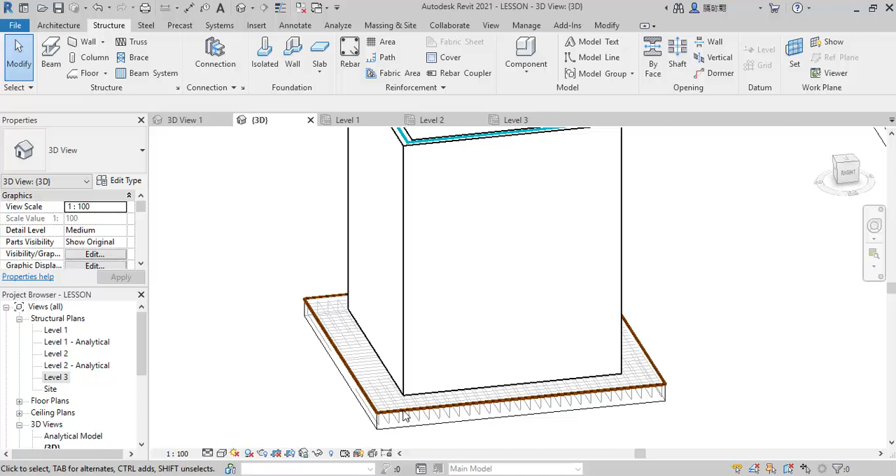You are welcome. In this lesson we will be learning how to reinforce a shear wall. We have already reinforced the raft foundation in one of our lessons, so you can check that through the video. Stay tuned, let's start.

So we navigate to the story tree. Alright, so I am at level 3 now, level 3, just like this.

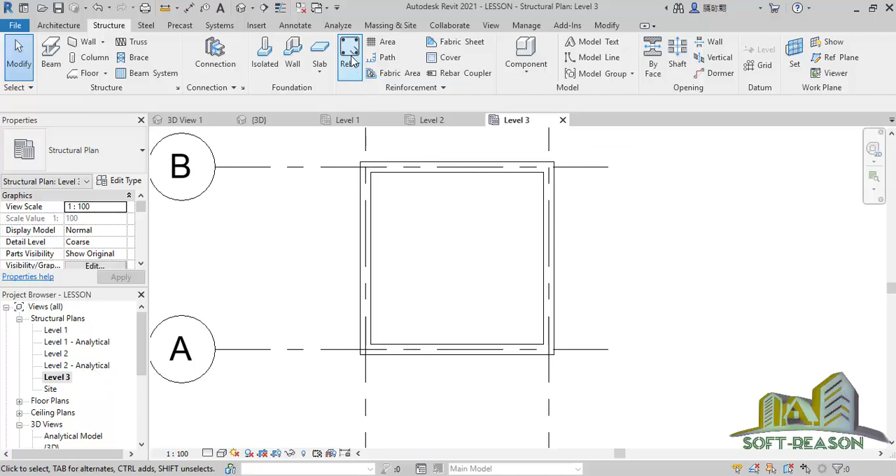So I will enable my Rebar. In the Rebar browser I will be using this rebar. Once I select this one, I will come to the placement and select near cover reference, and for the second placement I will be using parallel to work plane, this one.

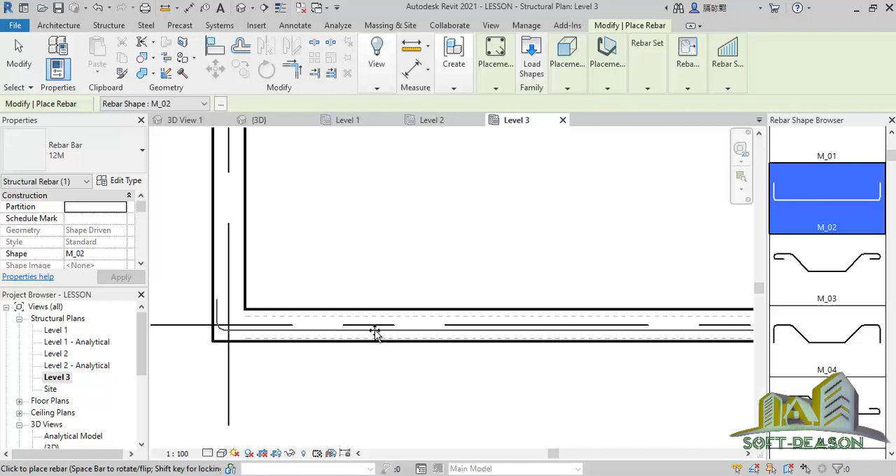So I will bring this rebar close to this place. You can see the cover is already highlighted in a dotted red line. So I want to place one here, just like this, place one here. After which I will click on the escape button.

So what I need to do, if you select this line now, just like this, you will notice the property of this line. You can see the rebar is 12M, meaning it is 12 diameter.

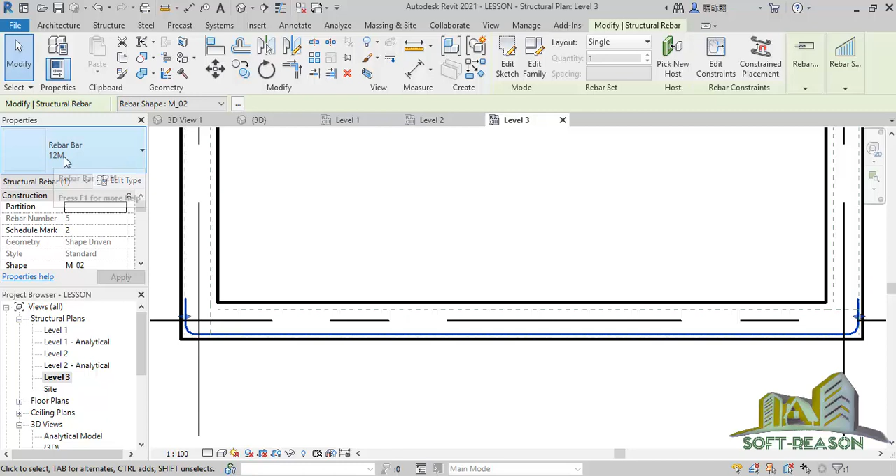So what I want to do is I want to reduce this hook, the hook length. I want to reduce it so it can fit into what I want to do, meaning I want to edit this rebar now, so I will go to edit type.

So in the edit type, this stirrup slash tie bend diameter is 50. I want to reduce it to 25, just like this.

Then the standard hook bend diameter is 80, I want to make it 40, and the standard bend diameter is also 80, I want to make it 40. The bar diameter remains the same, approximately 12 millimeter diameter.

So I want to come to this hook length, then I will click on this edit. The standard 90-degree hook length is 200, so I want to make it 100, just like this, the same thing there.

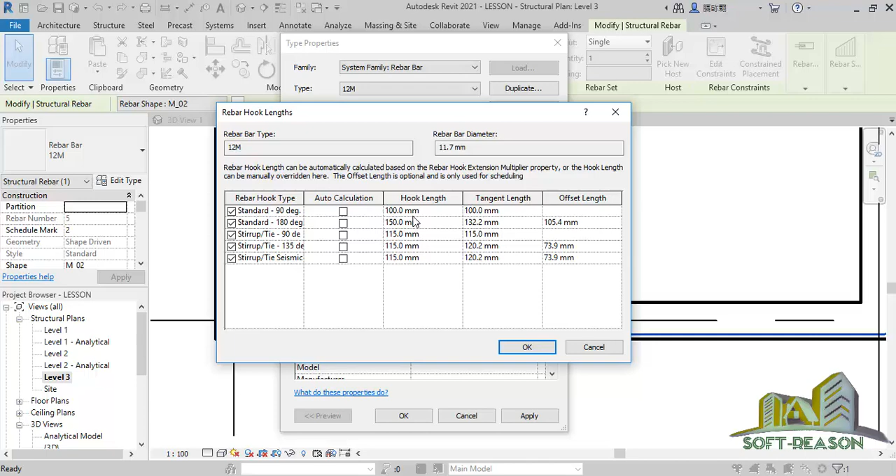Then click on OK. Once I apply, you see the changes here. So I click on apply, you can see the changes there, and click OK. So this is what I want at first.

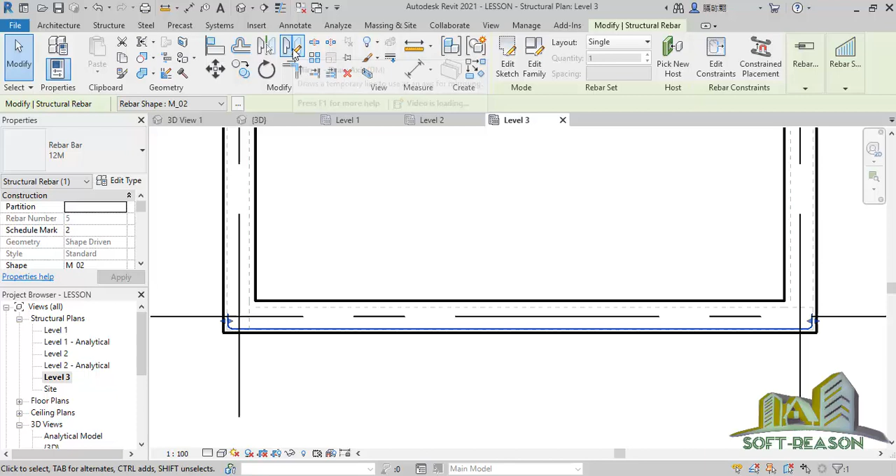Then what I need to do now is to mirror this. I will click on the mirror, click at this point, and then click here. It has mirrored, so this is what I actually wanted. So we have done in this direction, now we'll be going to this direction.

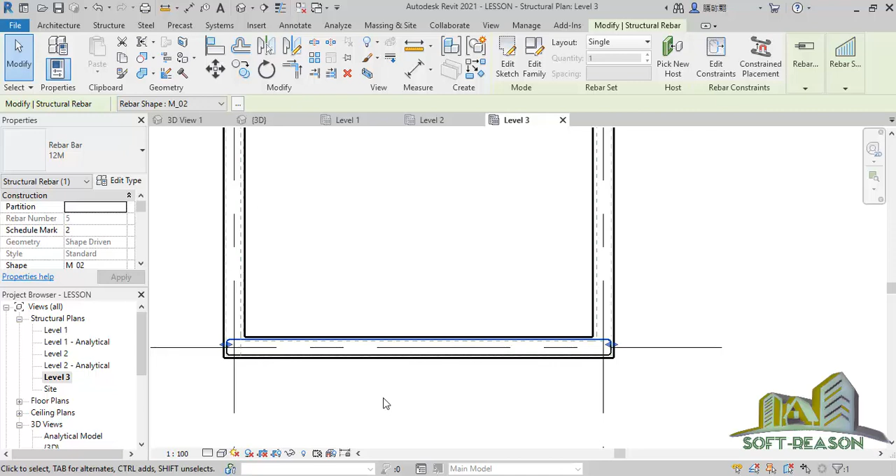But before we go to these directions, we will go back to our rebar and try to do something. Select this first one, hold the control key, select this one, just like this, and see if this can be copied. Successfully, let's check and then click on the copy.

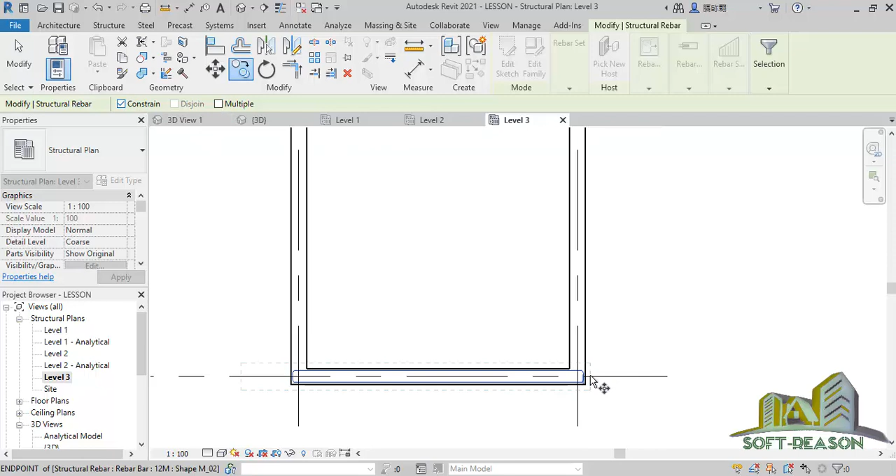Then we click on the constraint so you can move in that direction. So I will click on this point, then move it this way, just like this, and then I click on this point. Alright, it's been copied successfully.

So we have the bars here and here now. So we want to place it in these directions, this same bar 12M. So click on the structural tab and then select your rebar.

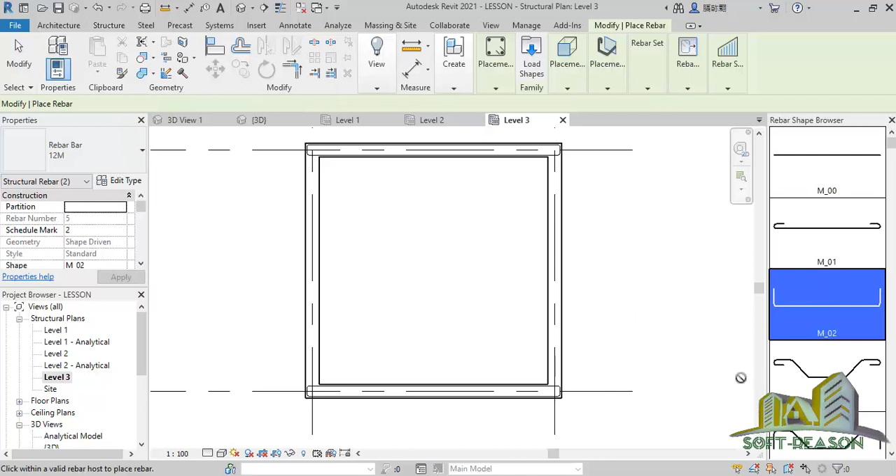Alright, so you now try to place it, just like this, place it just like this. Then you click on modify and select it, then you use the mirror tool.

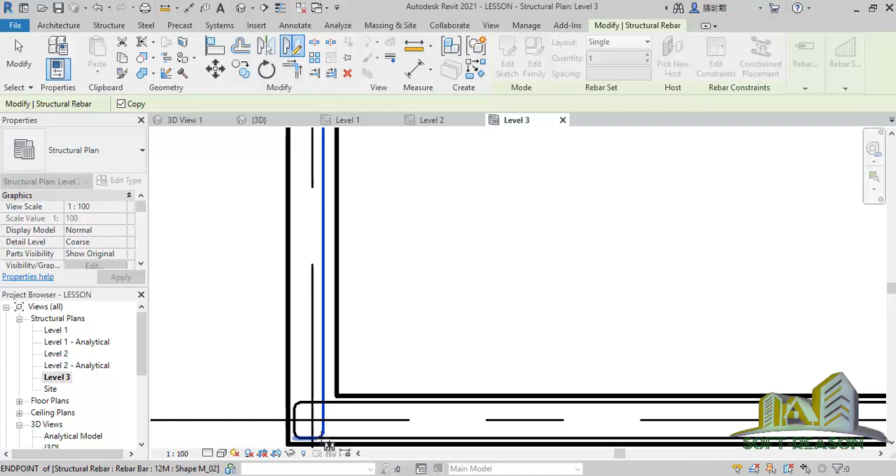The mirror tool, you can click at this point of intersections, this point like this, and then select here to mirror.

But we will have to adjust this, just like this, and also we adjust this one just like that.

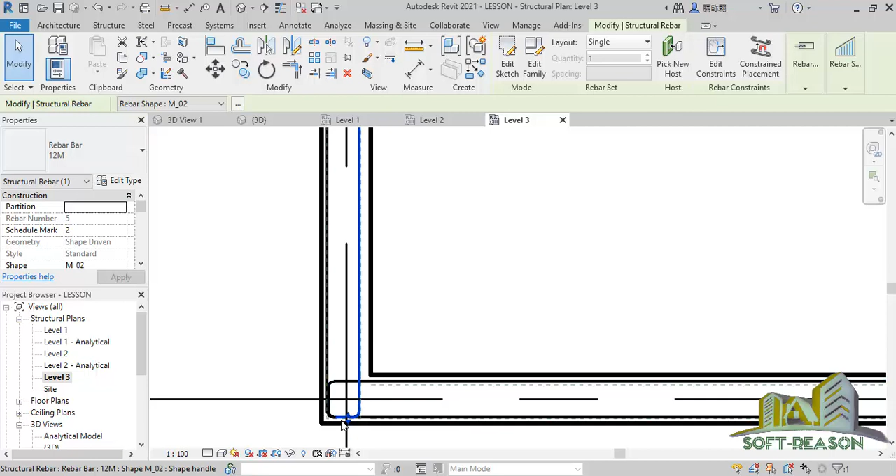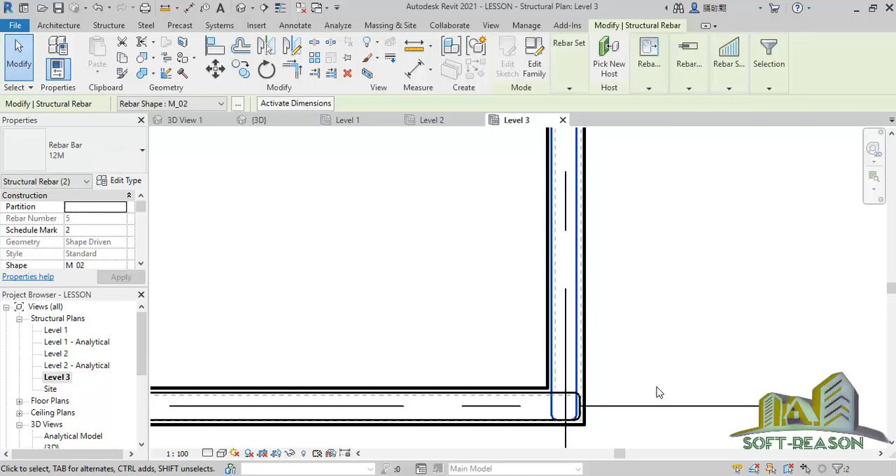You hold your control key, you select this, and then you click on copy, you enable constraint. Then you click at this point, and then you click this point, then you can move it a little bit this way.

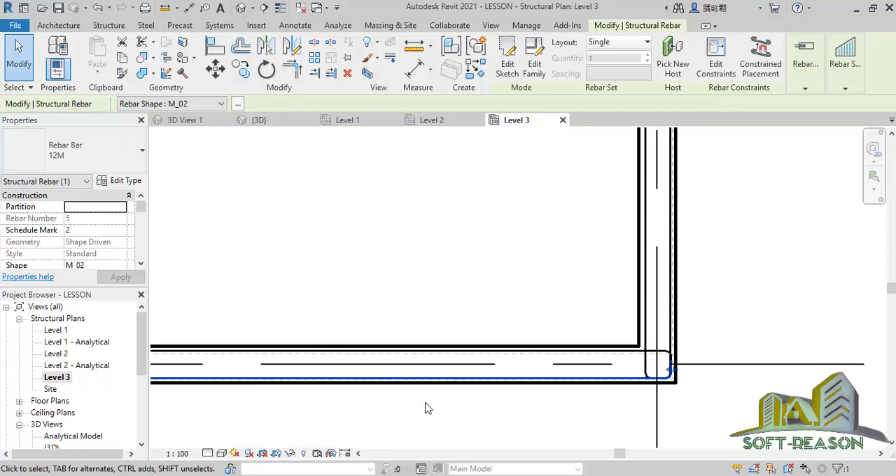So after placing this successfully, the next thing we need to do is select one of these, like this. Then we will type SA. This SA will help you select all the bars that are here, select all.

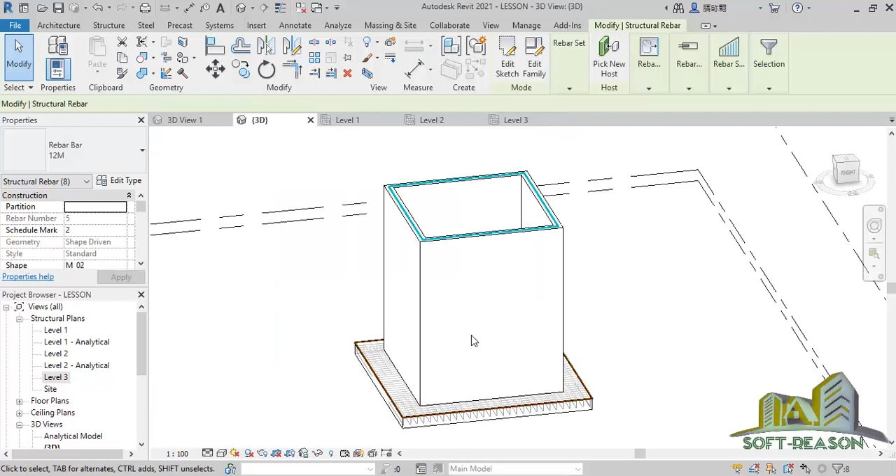So what we need to do is we want to actually generate it, but before we do that, I would like us to navigate to the 3D, just like this. So once you navigate to the 3D, I want to make this a little bit transparent.

So I will highlight the walls, so all the walls are highlighted. I will right click, go to override graphics in view, and then select category. You move this to this point for a kind of visibility transparency, click applied, then click OK.

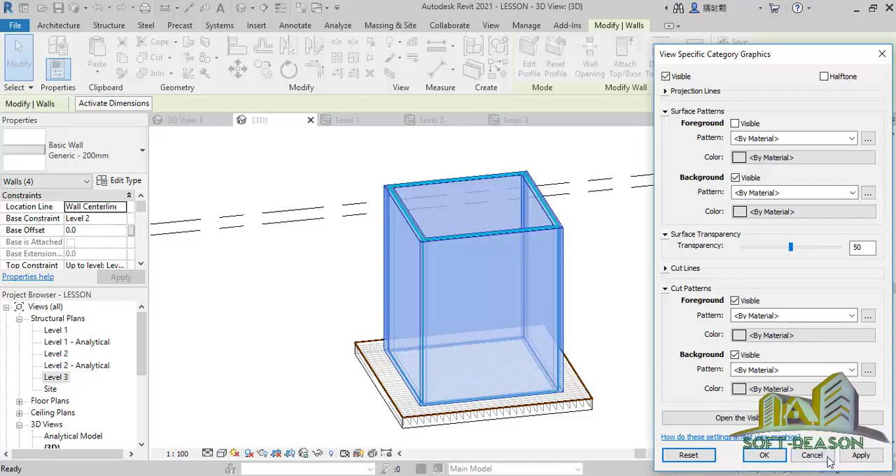You can see it's being transparent. So you go back to level 3, and in level 3 you can now select one of these, and then you type SA to select the rest of the bars, just like this, and then you navigate to the 3D again.

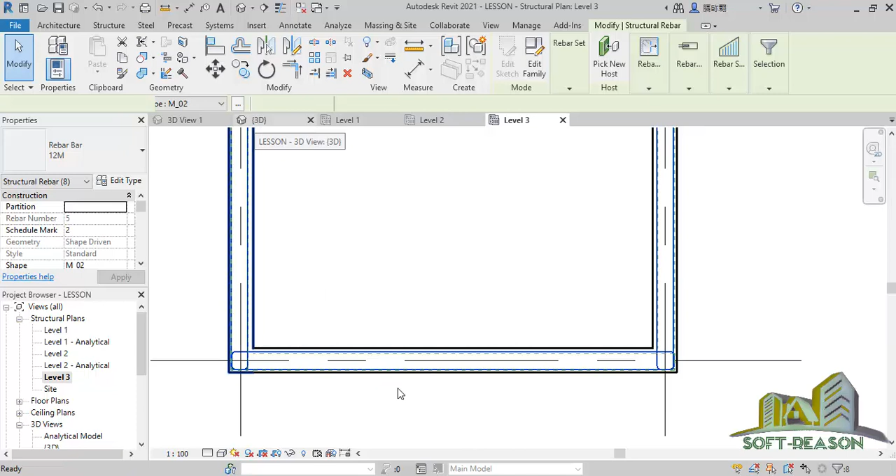Alright, so now what you need to do is you come to this place, where you have this rebar set. Then you select maximum, and you can see all the rebars have been generated successfully. So you come to this place and negotiate the spacing.

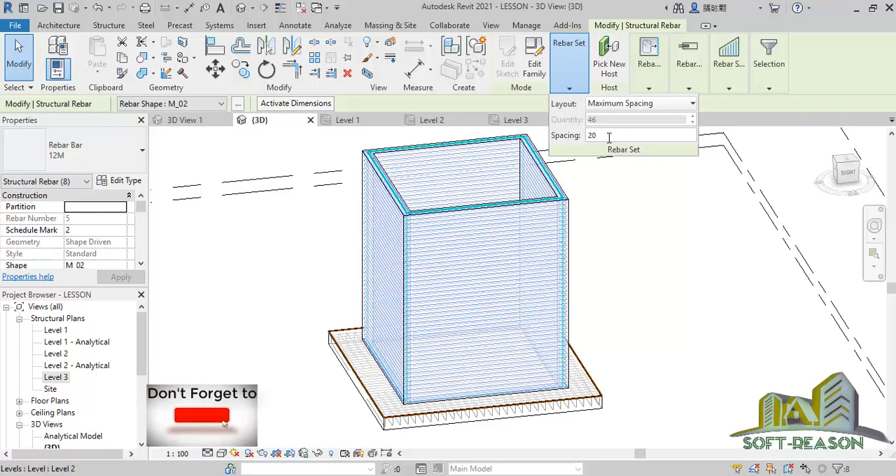I want to negotiate the spacing to be 200. Alright, so this is the rebar generated in the horizontal directions.

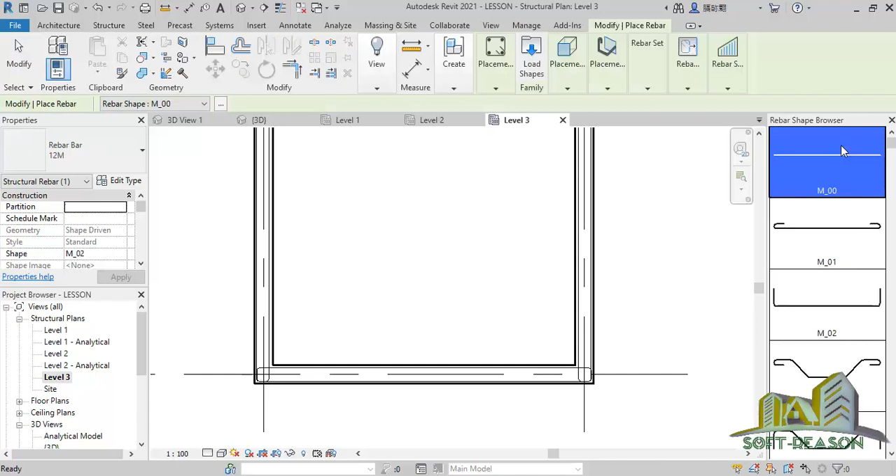So I want to go back to this level 3 in the plan view. Alright, and then I will navigate to the rebar browser, and in the rebar browser I will select this one. Once I select this one, I will come to this place and select this perpendicular to cover.

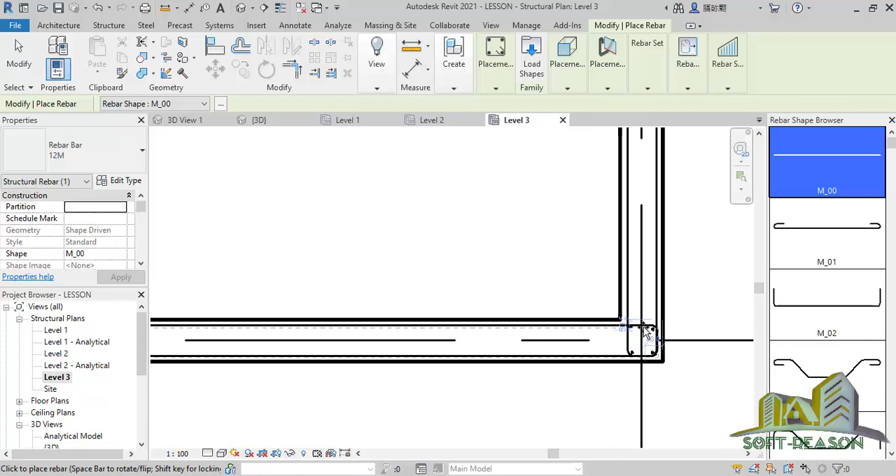Just like this, and then I'll be able to have this. So I will click this point, click here, put one here and one here, and also one in this place. After which I will be generating this bar towards these directions. So what I need to do is I will escape.

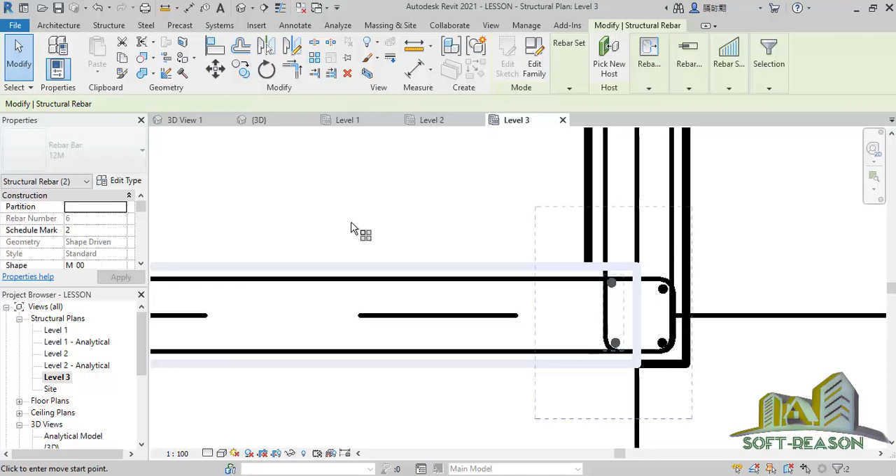Select these two, this one, and with the control key select this one. After which I will select the array tool. Once I select the array tool, I will click on this place, this one last.

Then in this place I will give a number, for instance I will say 50. So I click on this point. I will have to zoom it out. Click on this point and then come to this point and click.

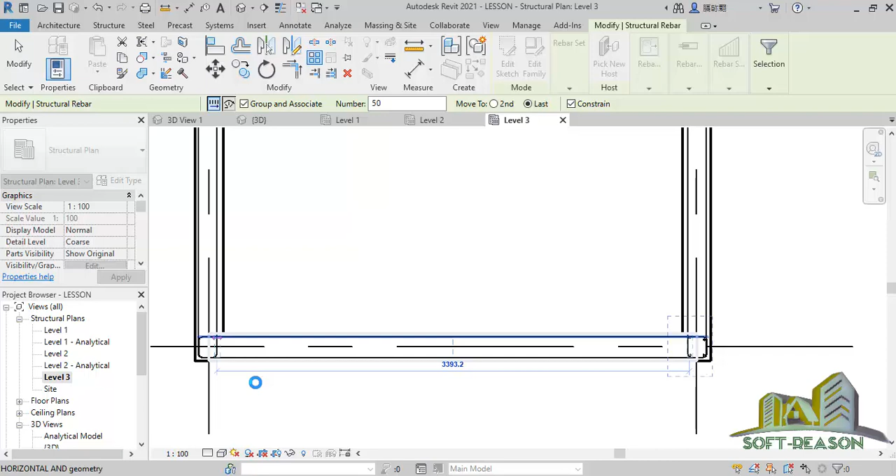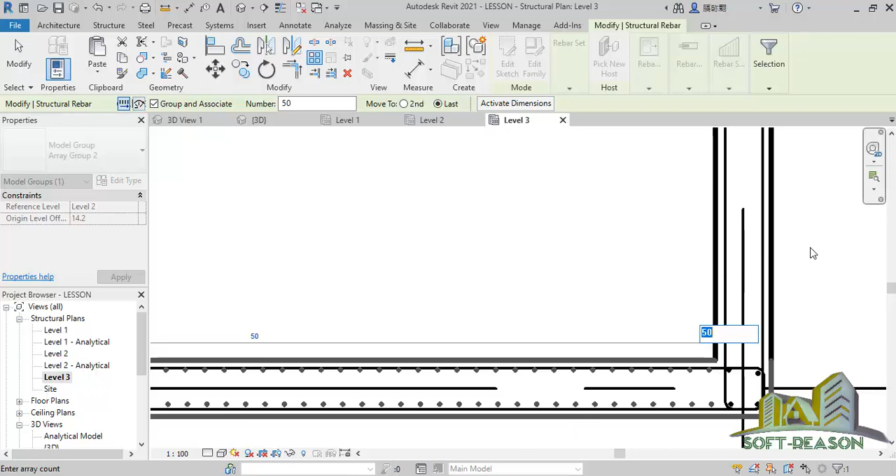Alright, so you notice the bars are generated successfully in this direction. And so I will be doing the same thing in these other directions, so I can negotiate the number of bars I want in this direction, but this is okay by me, so I will click outside of the workspace, and it's in place now.

Okay, so these two, I want to ungroup these two. I click on this ungroup tool so as to ungroup these two. Alright, now these two are ungrouped. I can use my arrow key on the keyboard to place it, right?

After which I will copy. I can copy this one now, click on it, select this one, and then use the arrow key to move it inside of this place, just like this. Then select this one and correct its position.

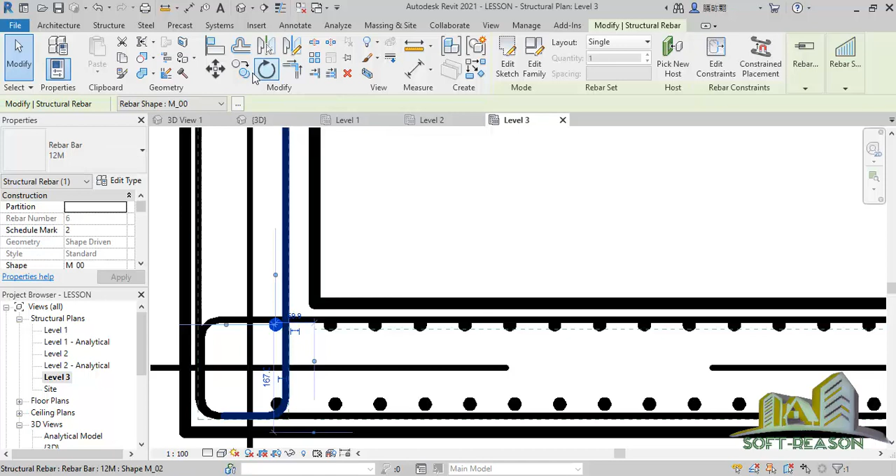Now I can also copy this one. I copy this one, I click on multiple, so I can place more than one. Put one in here and also put one in this place. So I can adjust this one now, just like this, using the arrow key.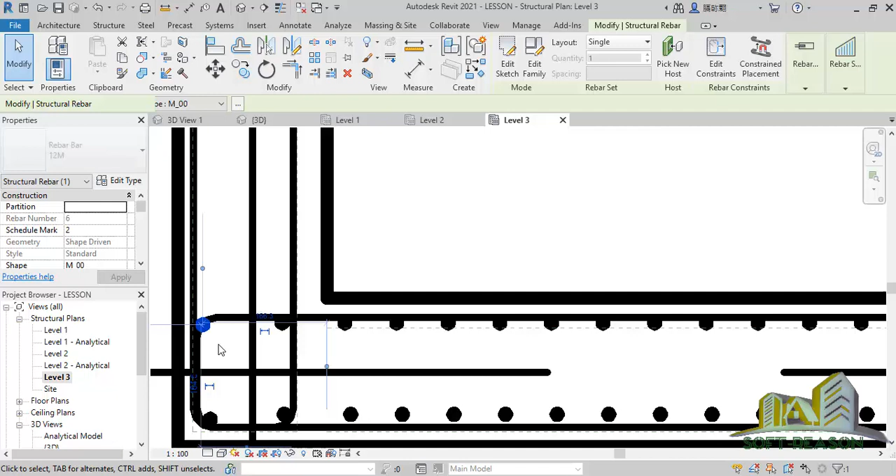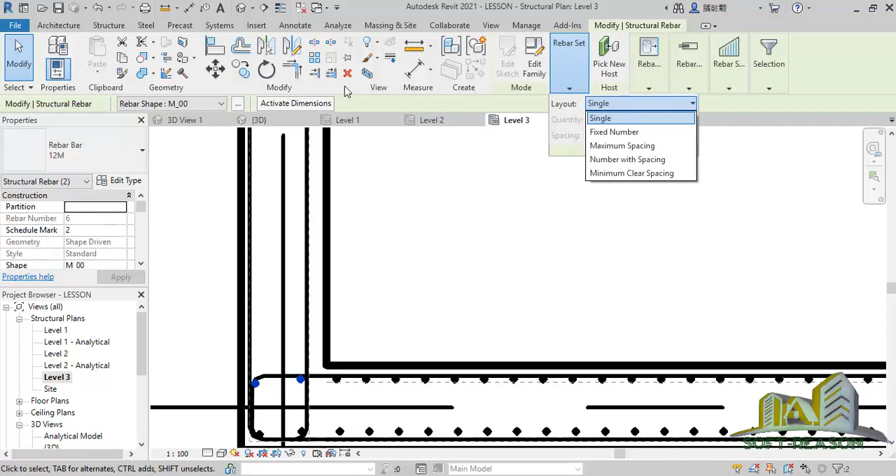Alright, so after which I will hold my control key and select this one, and then I will go to maximum spacing. I will still use the array first. After selecting these two, I will still use this array, click on the array, and give a number to be 50. Then you zoom it out.

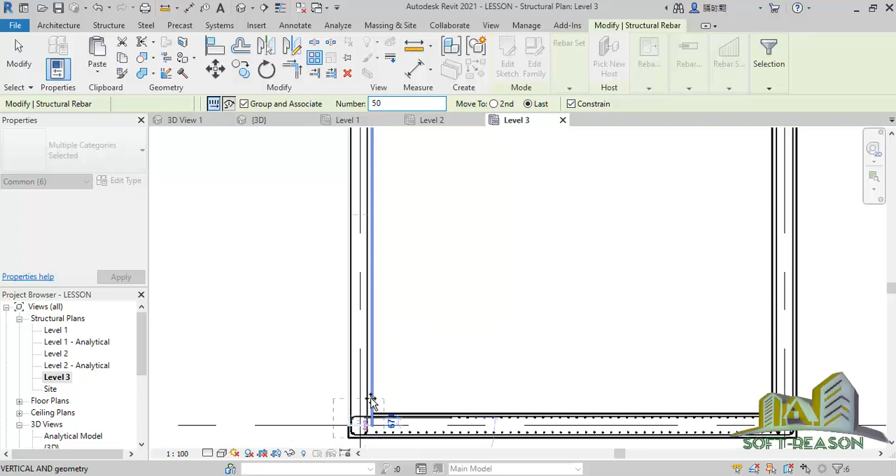Just like this. Once you zoom it out, you click on this bar, and then you click on this particular point. Alright, so it's been generated also successfully.

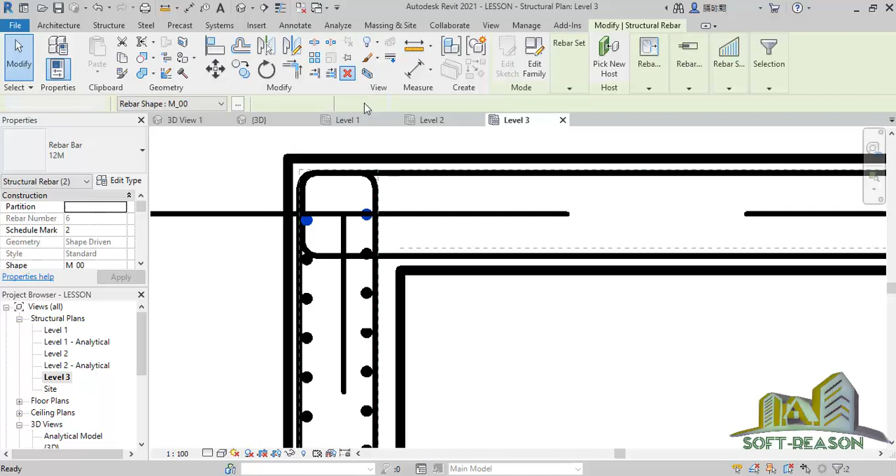Okay, so what we need to do is I will ungroup this one and delete it, just like this. For this one, I will also ungroup it, then use the arrow key to place it at the right position. I'll select only this one so as to be able to place it very well.

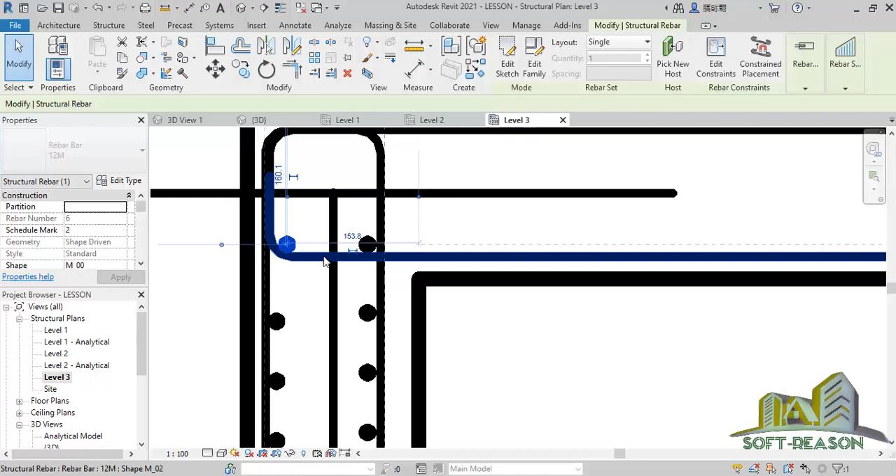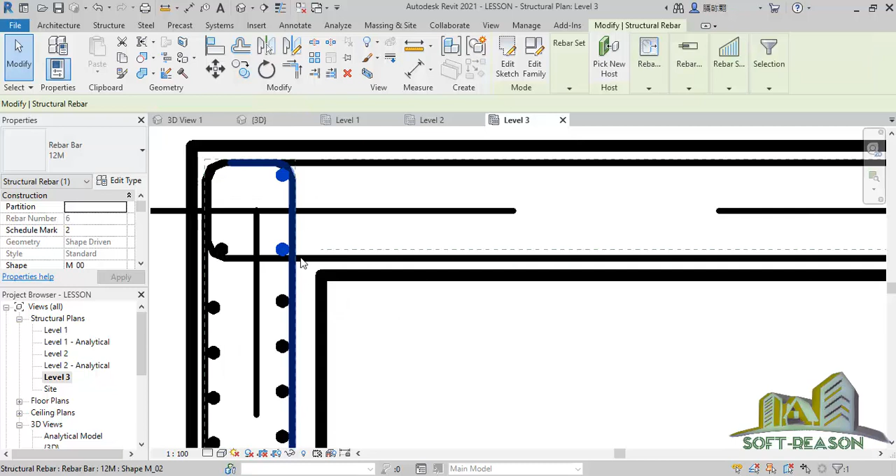Just like this. Alright, so I will select this one and then click on copy, and as well I will select the control key so I can select the two of this. Alright, after which I will click on the array again.

So as to distribute it in this direction. So I will type 50 here, then I'll click on make sure you enable constraint, so that you can move in a specified direction. Then I'll move it to this point and click.

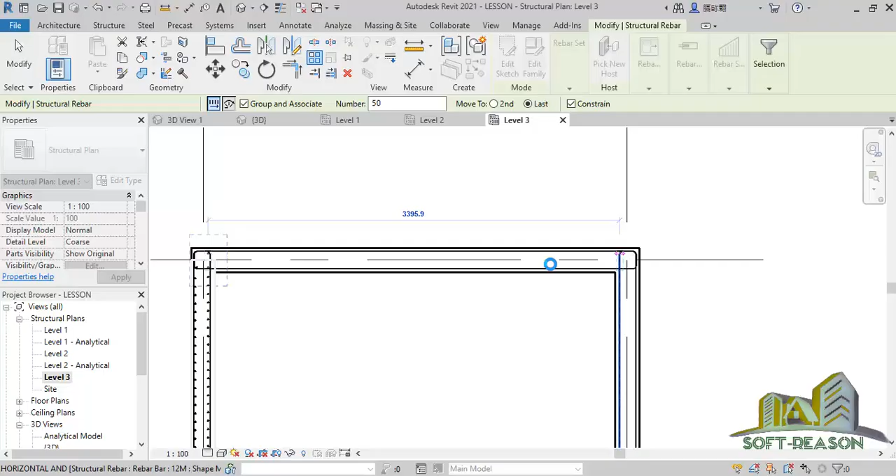Alright, it's being generated. So I'll select this one. I will ungroup this one, and then I will move it just like this. And then I'll select this, and I'll be able to copy this to this direction, just like this.

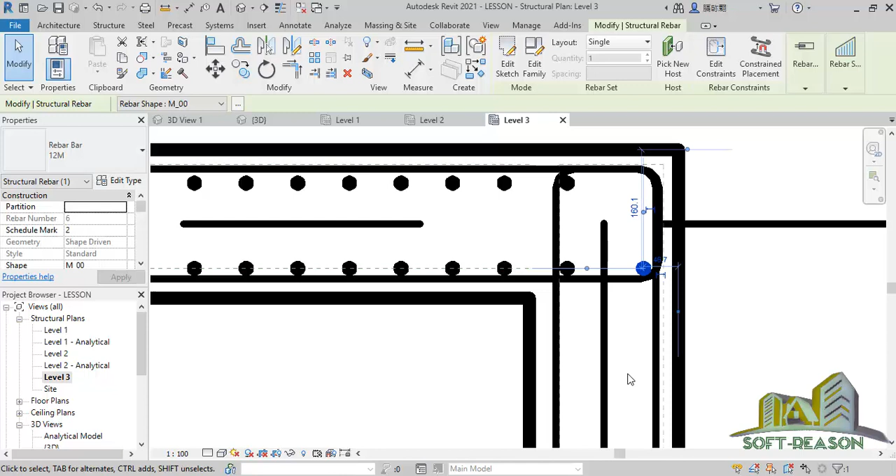Alright, after which I may use the arrow key to adjust it. Click on escape, adjust it using the arrow key, just like this. So I'll hold my control key and add this one to selection, and then I click on array.

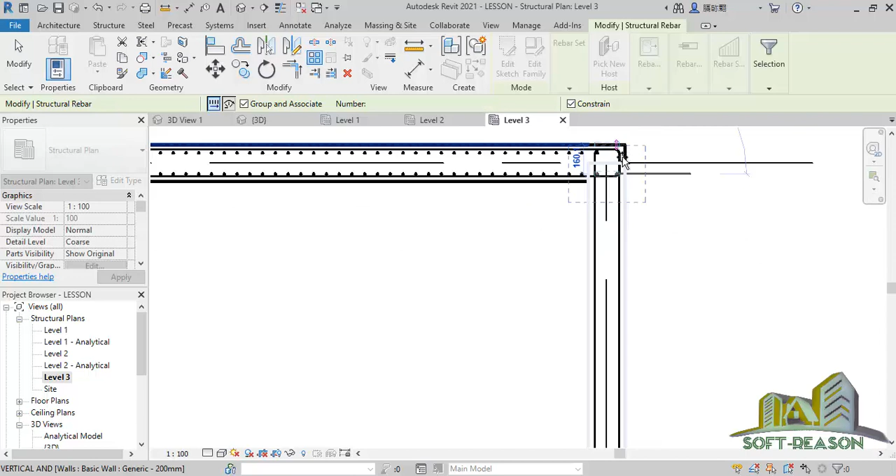Type 50 here. And then I will click on this one, zoom in, and then select this last point so as to generate it in these directions. Alright, so it's being generated successfully.

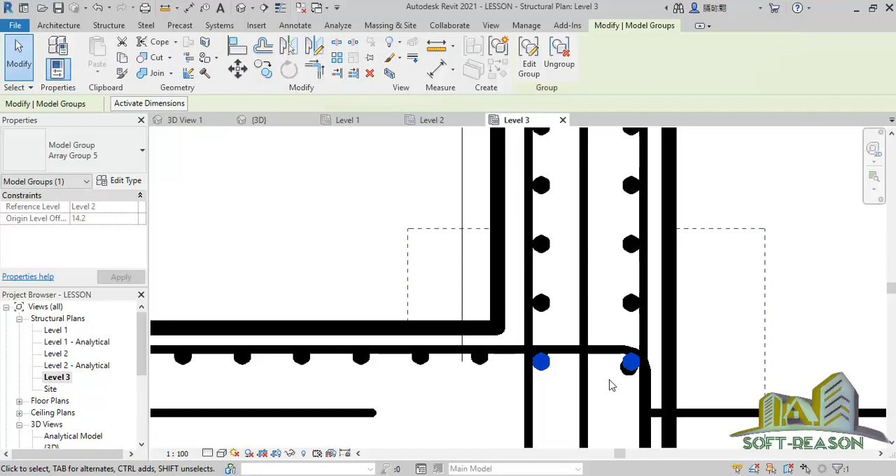I will select this one, ungroup it, and then I will delete it. Alright, so this is what we have in this. So if you navigate to the 3D, you will have something of this kind.

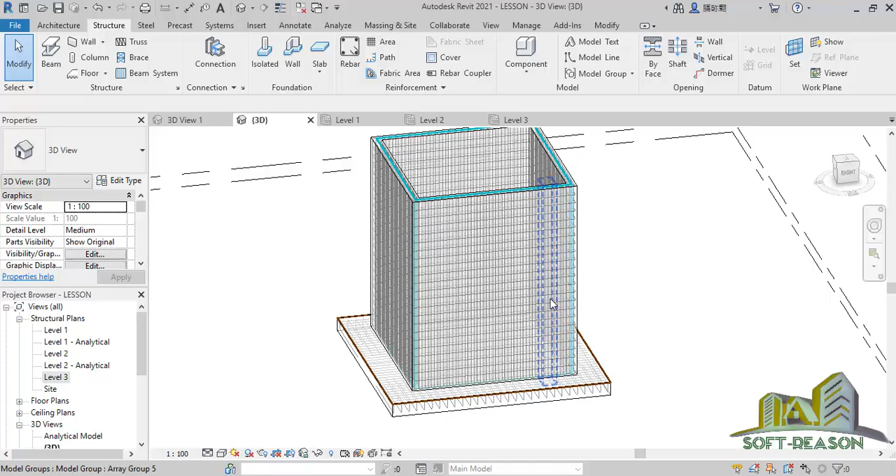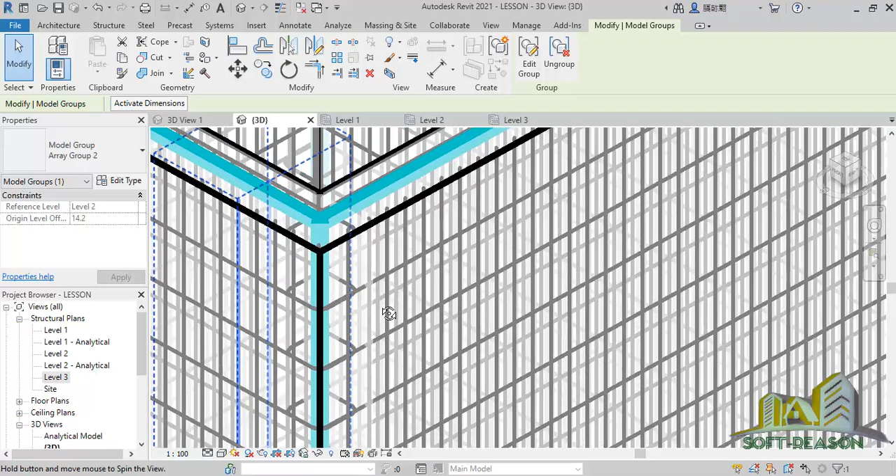If you zoom in, you have something of this kind. So this is how you place your rebar in a shear wall.

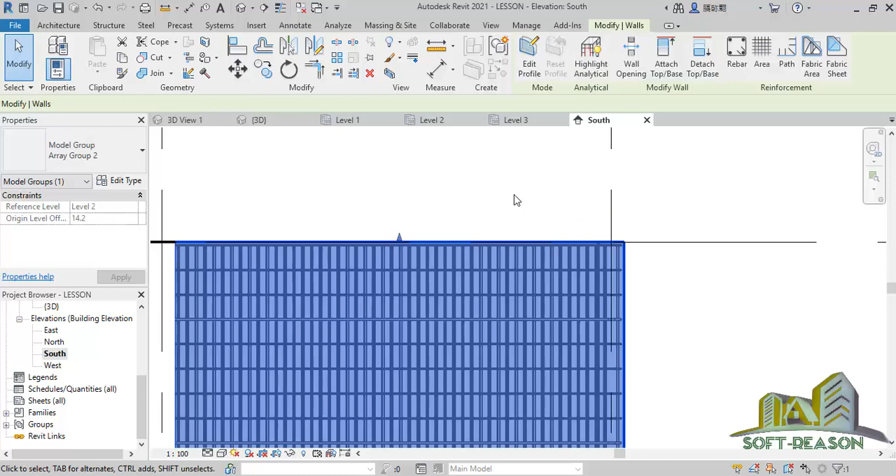Okay, so if you go to the left elevation, maybe the south elevation, you notice that nothing is showing here. But you can select this, right click, and check this in these directions. You can make it a little bit transparent, click apply, then click OK. So you are now seeing the bars in these directions.

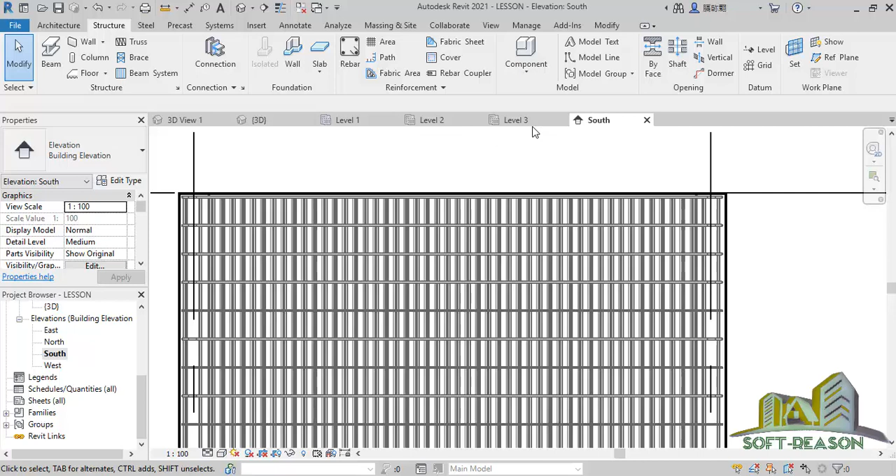Okay, having seen the bar in these directions, you can equally click on level 3. If you select this bar or hold your control key and click on this point, just like this, then go back to the south elevation, you notice almost all the bars in that direction are selected because they are in a group.

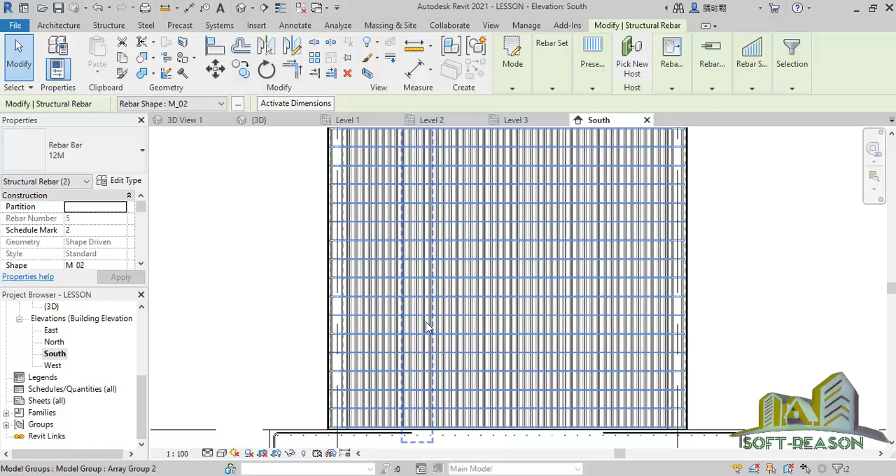So what you need to do is go back to this point again, level 3 again, they are already selected. You click outside, then select this first one, and then go ahead and select this one. Now we get to the south elevation.

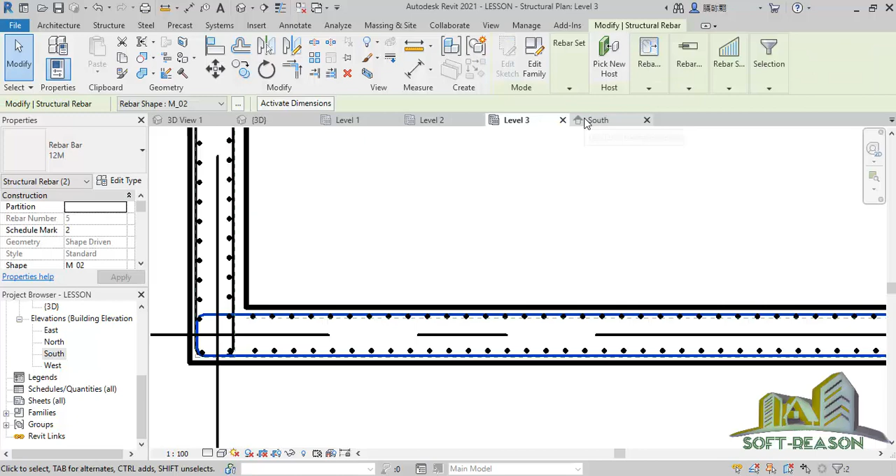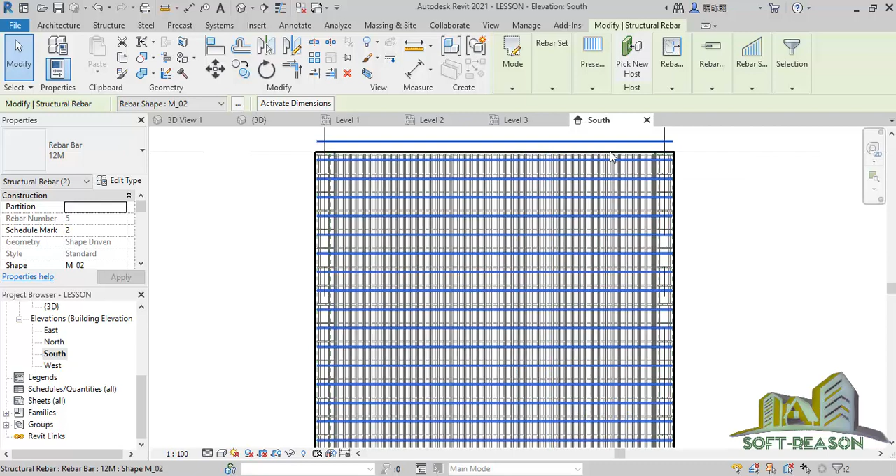Use your arrow key to space this bar this way. You will see that this bar is being spaced outwards for continuity. You can also undo this.

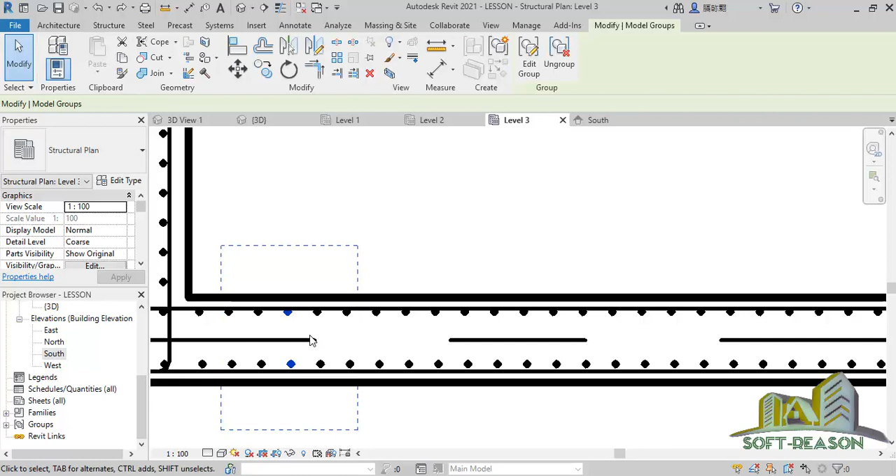You can undo what you have just done. So go back to this 3D, to level 3 again. You select this one, and then select all the ones in this direction, all of this one.

If you click here, you will notice you can select some of these just like this. You can also select this particular one in addition.

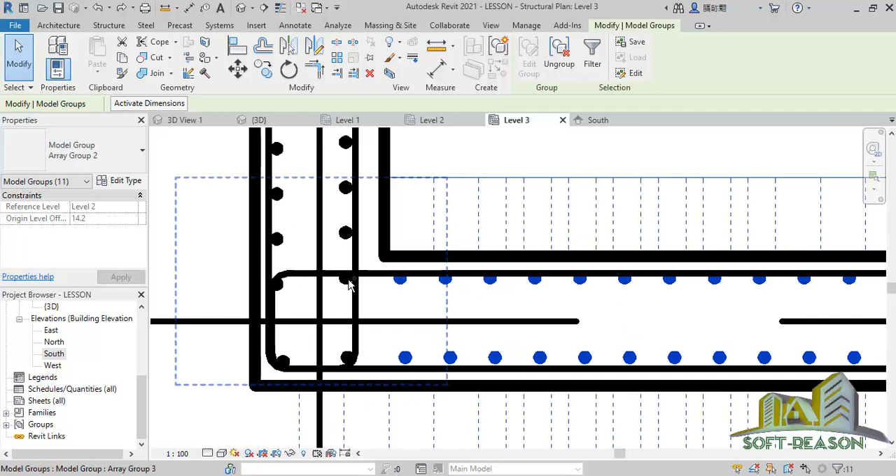Now if you go back to the south elevation, all these bars selected, you can use your arrow key to bring them upward, just like this, for continuity.

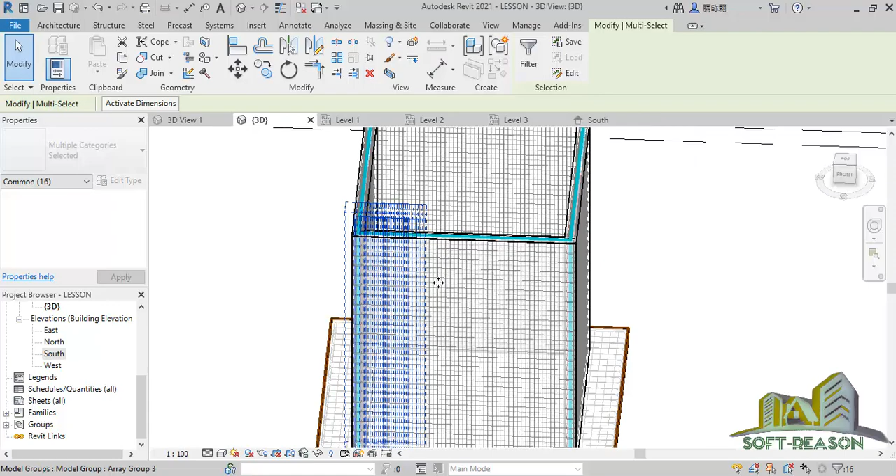So if you go to the 3D now and click outside, we'll be having some bars here. You can see some bars there. So that is how you can bring out some bars for continuity.

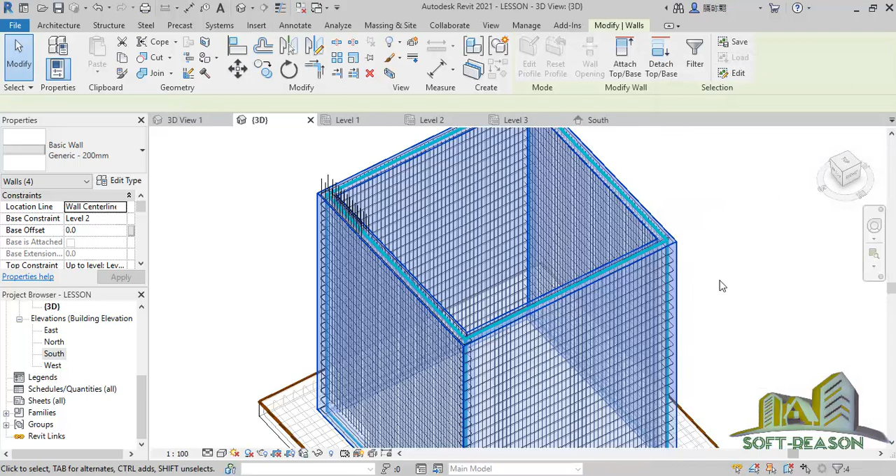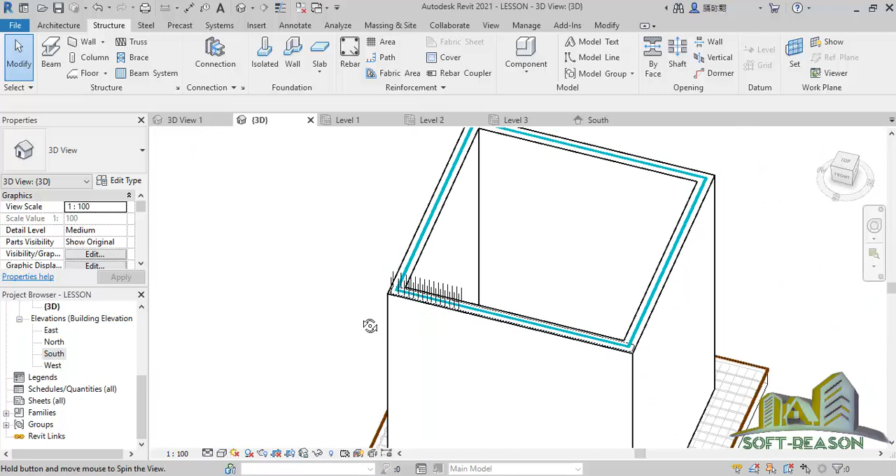You notice that these bars are meant for continuations. You can do that on your own, but for the sake of this lesson, I just want to show you how it works. They are for continuation, so you can do the same around the whole of this place for continuations, and how the bars are connected to one another.

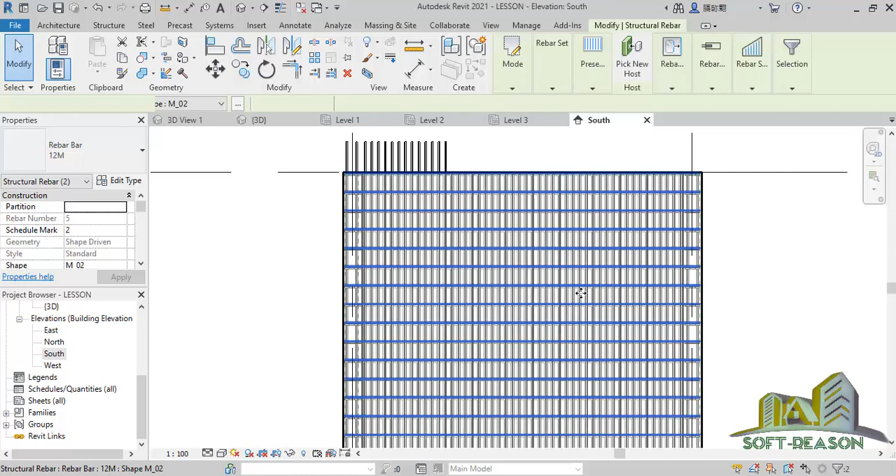So you can also do the same to this. If you select this, or hold your control key, select this one. Go to the south elevation, then use your control key to move this upwards, just like this, and go to the 3D of it.

You will notice this is how it's been done, which is the continuation of this.

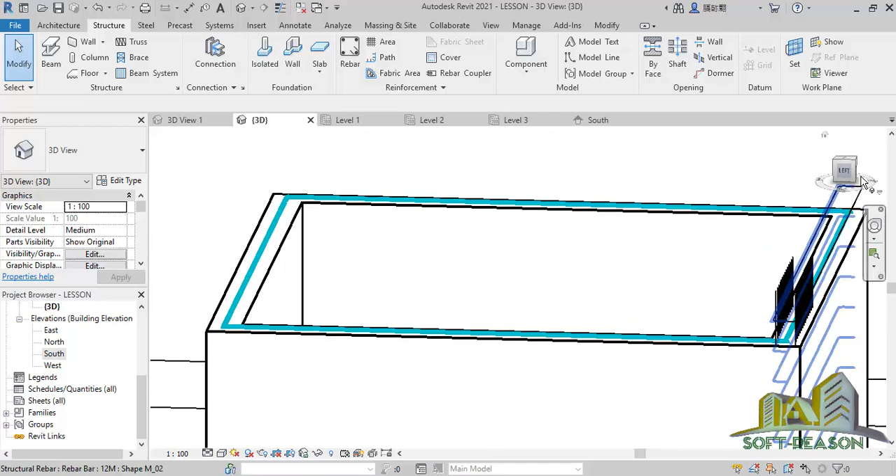So the next thing I would like us to look at is a kind of spacer. You can use a bar for your spacer, so as to hold these spaces in place. You can also use any other wooden material, or you can decide to use this bar for our spacer.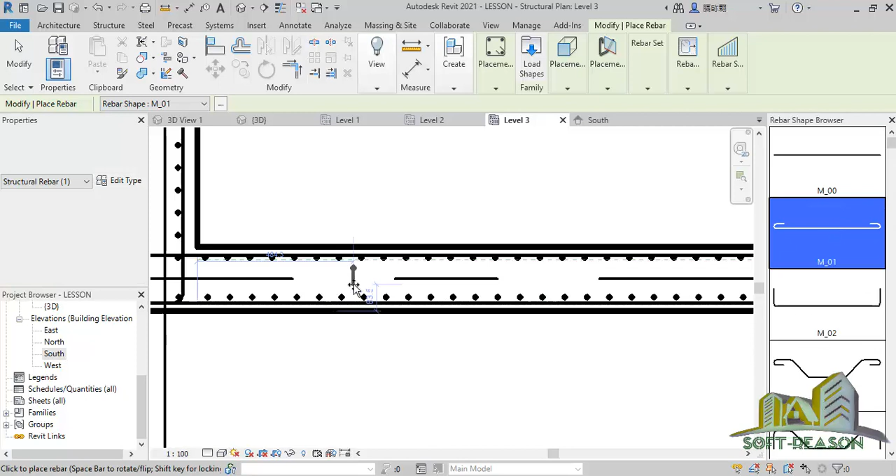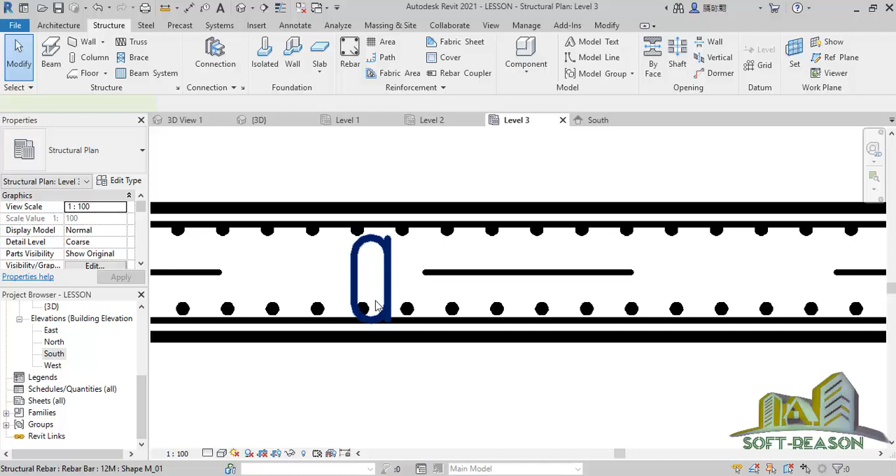So you bring it here, try to change the orientation. If you come to this place, you can set it parallel to the work plane, just like this. You place it, click on it, try to adjust it so you can have what you actually wanted. Use the arrow key to move it this way.

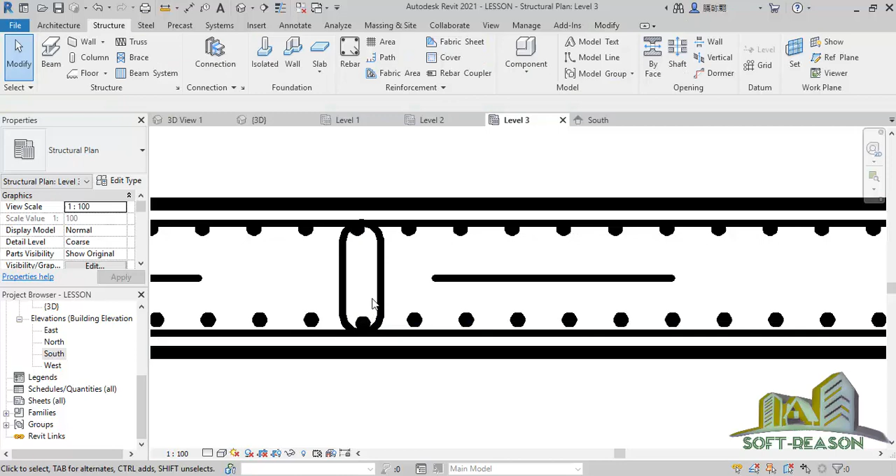You can select this, group it, and then move this one closer, just like this. This one will be able to space and maintain the wall thickness, while at this side, this one is the wall line, and this is the concrete cover.

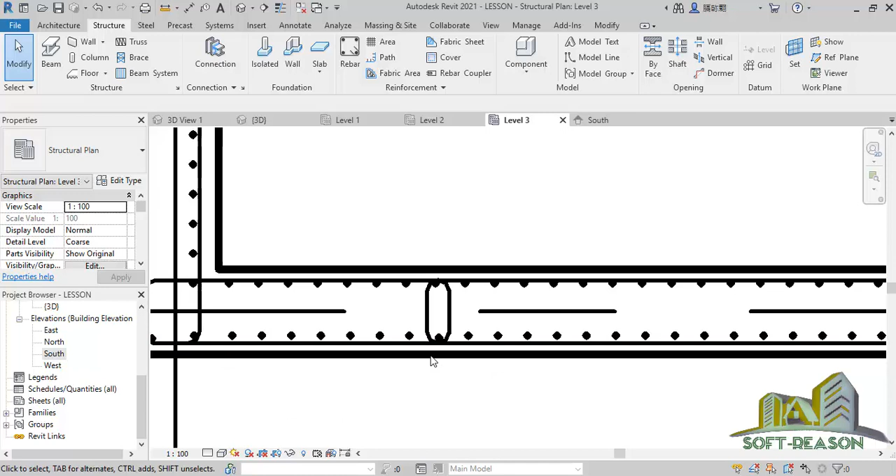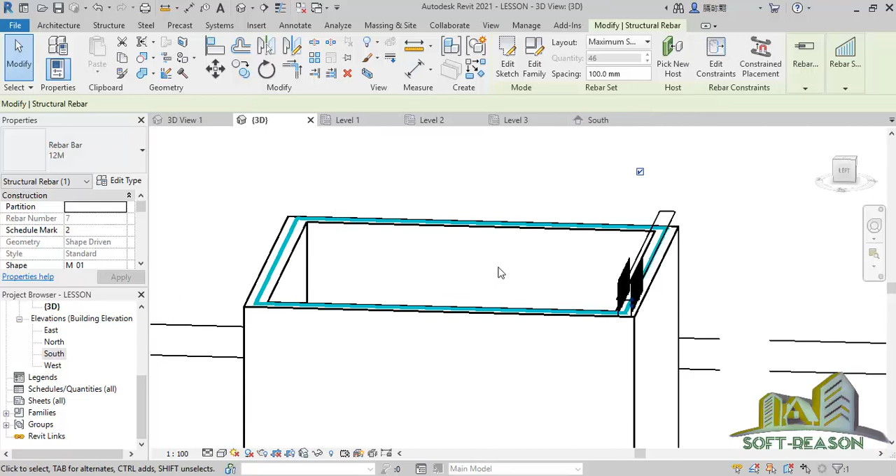So if you click on the 3D now, you have something like this. You can decide to reduce the transparency, just like this.

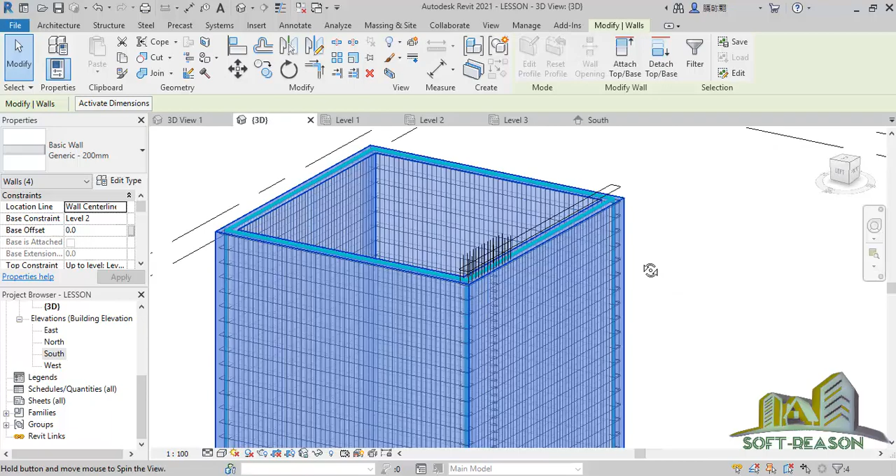Selecting this one, press Tab to select the rest, just like this. Then if you rotate it, you see the bars here, see the one I just placed, see it here for our spacer, up to this point. So you can also place it along this line, along the other line.

So this is the lesson, how to place rebar in a shear wall.